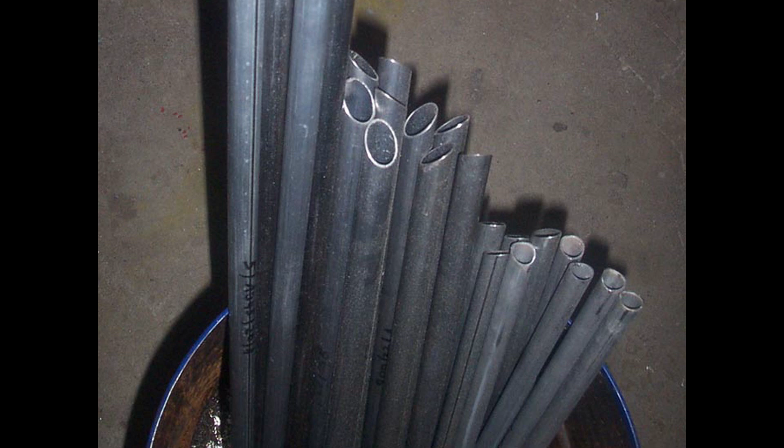In the summer of 2007, just 12 months after the start of construction, the 3 Fokker D.VIIIs were already so far advanced that I was able to present them to the public. Shortly afterwards, in November 2007, they were shipped to New Zealand. But they were far from finished yet.

Although they were not yet finished, they were wanted in New Zealand in advance, because they wanted to speed things up. They decided to manufacture all the missing parts themselves at their Wairarapa Aviation Limited, according to my plans. The original plan was for me to make everything for the airplanes except the wings and the engines, meaning the 2 planes and the rather bulky wings were out of the way at least.

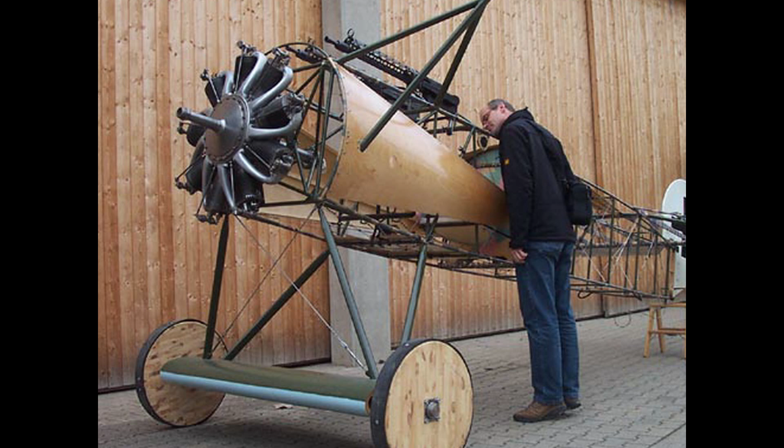But then things turned out differently, as usual. A short time later I was informed by Gene DeMarco that they had decided to have all the other missing parts made here at my place as well.

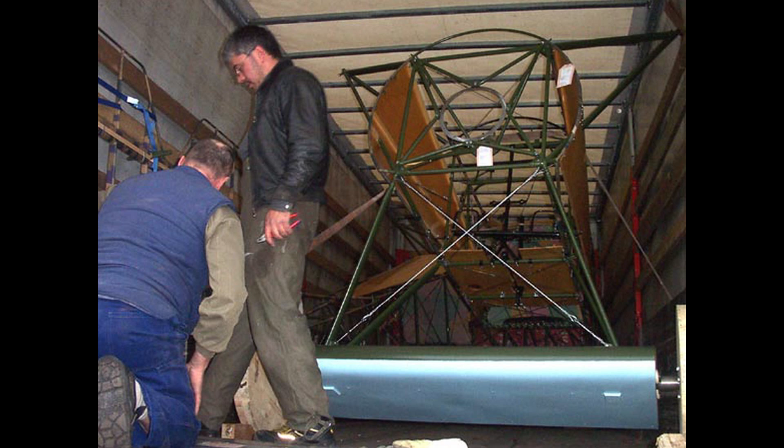That was of course an adventure and something I'm very proud of in retrospect. There were 3 airplanes of the same design, but 3 individually hand-built airplanes. There can be deviations in the design that prevent assembly in the end. Not even Airbus has managed something like this really well with all their distributed production sites.

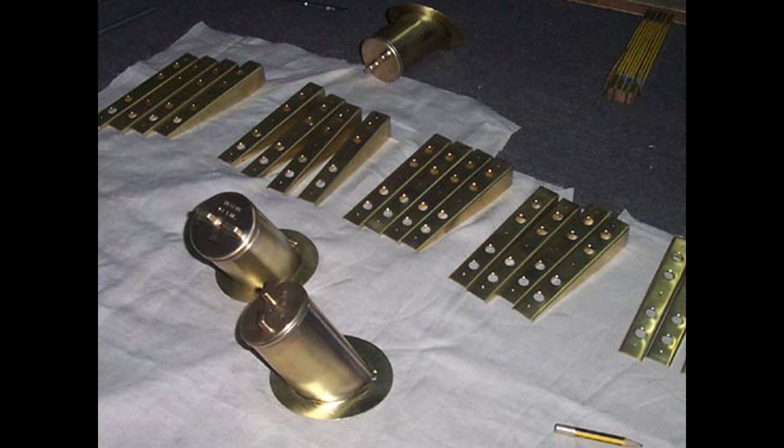I now only had my cuckoo of the 3 airplanes left at my place, and as it was just as advanced as the others, the theory was simple. Everything that was missing was built 3 times, adapted and fitted to cuckoo as a master pattern. I used the most unattractive of these 3 parts for my own airplane and packed the more beautiful ones for New Zealand.

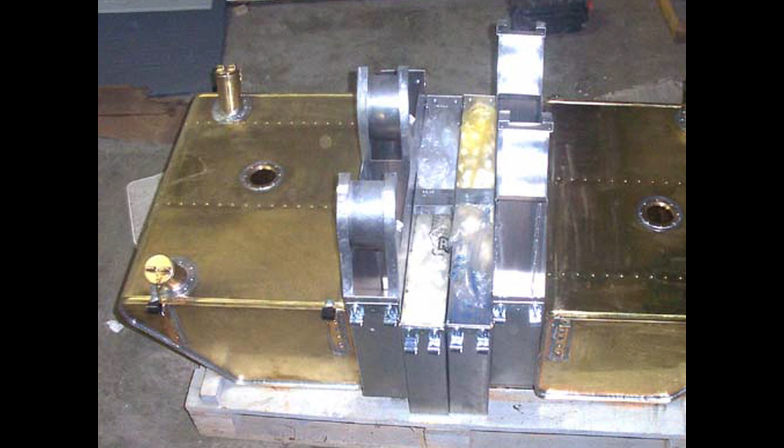It wasn't a small amount of parts that still had to be done, and so I built all the parts for airplanes that couldn't have been further away. Every meter further away would have brought them closer to me again.

Meanwhile, the construction of the D.VII and Dr.I was resumed. As I was now mainly working on the wings, I also started building the wing for my cuckoo. Shirley did a lot of work on this.

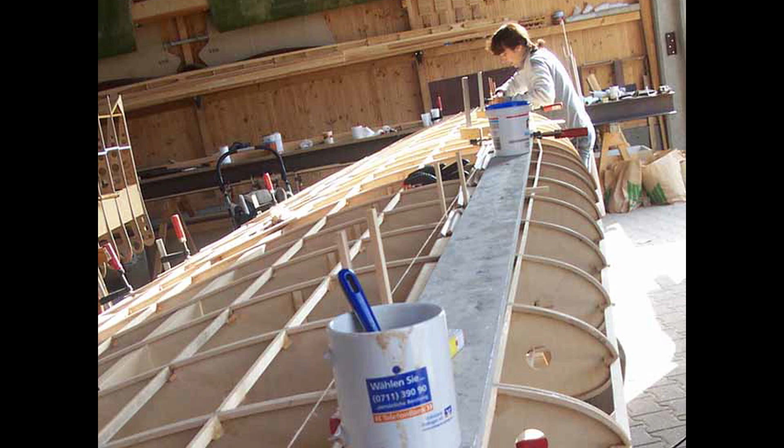When the installations for the completion of the entire fuselages of the remaining D.VIIIs were finished, I set mine up in my workshop. In the meantime, components of all the important Fokker war types were spread out there. The M series was represented by the E3, the V series by the DR1, D7 and D8 — a phenomenal sight.

When all the missing internals for the D8 had been completed for New Zealand, they were neatly packed and prepared for shipment. In the meantime, construction of the Rumpler C4 had begun in New Zealand, based on the plans that I and Hartmut drew up in the evening.

When it came to the tailplane and aileron components, which were made of tubular steel, I received an order from New Zealand to procure metric steel tubing in the qualities used at the time for all components, which I then did. They were to be sent to New Zealand together with the D8 parts.

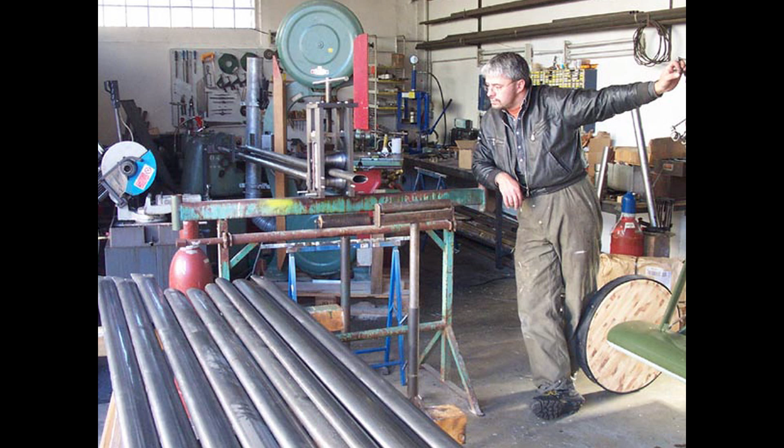Shortly before the shipping date, I was asked if I could perhaps produce the streamline-shaped undercarriage tubes for the legs of the heavy Rumpler C4 on my self-built forming machine. I wanted to give it a try. After all, my forming machine was not designed for heavy tubes of almost 80 mm diameter and 2 mm wall thickness. But it worked quite well, and so I made all these profiled tubes for the Rumpler C4.

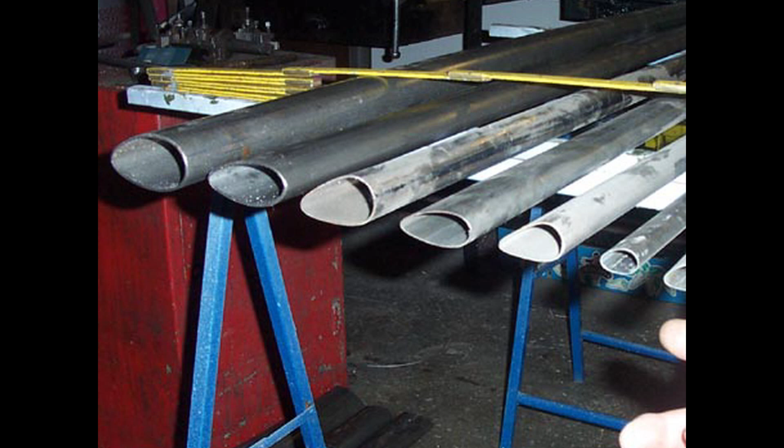When I placed my order for the steel tubes, I asked New Zealand if I could add the steel tubes for a full set of tail feathers and ailerons at my own expense, so that the set could be built for me at their place. No problem, they said. I had no intention of building a C4 myself, but you never know, so at least the foundations had been laid.

The steel tube and the D8 components were loaded into a container.

During my first visit to New Zealand, I spent most of the time in the workshop there, and there was a large anvil missing. They have never been easy to come by, and I still had a 140 kilogram heavy comrade in the corner that was too big for me.

I talked to Gene DeMarco and the workshop managers, and they were happy about this gesture. The block was out of my way, and the guys got something out of it. Small gifts keep friendships alive — most of the time.

A short jump back to the moment when the D.VIII was not yet shipped to New Zealand. Shortly before that, I gave a short interview for a radio program, and shortly afterwards I organized an open day at which the aircraft were presented to the public for the last time on German soil.

Many people attended, including Peter Kohaus again, who reported on this in issue number 2 of 2008 of the magazine Flugzeug Classic, when the planes were long gone already. I will play back the interview after the article, which I will now read out for you. Have fun with it.

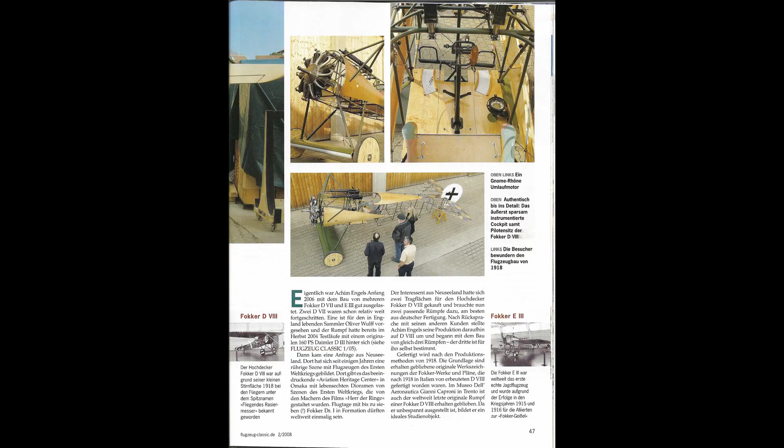2 D.VIIIs were delivered to New Zealand at the beginning of November 2007. At the beginning of 2006, Achim Engels was actually busy building several Fokker D.VIIs and E.3s. 2 D.VIIs were already relatively far advanced. One is intended for the collector Oliver Wulff, who lives in England, and the fuselage had already undergone test runs

with an original 160 horsepower Daimler D3 in the fall of 2004. Then came a request from New Zealand. A lively scene with aircraft from the First World War has been developing there for several years. There is the impressive Aviation Heritage Center in Omaka, with lifelike dioramas of scenes from the First World War, which

were designed by the makers of the film Lord of the Rings. Flying days with up to 7 Fokker DR1 in formation are probably unique in the world. The prospective customer from New Zealand had bought 2 wings for the monoplane and now needed 2 matching fuselages, preferably made in Germany. After consulting with his other customers, Achim Engels then switched his production to D.VIII and began building

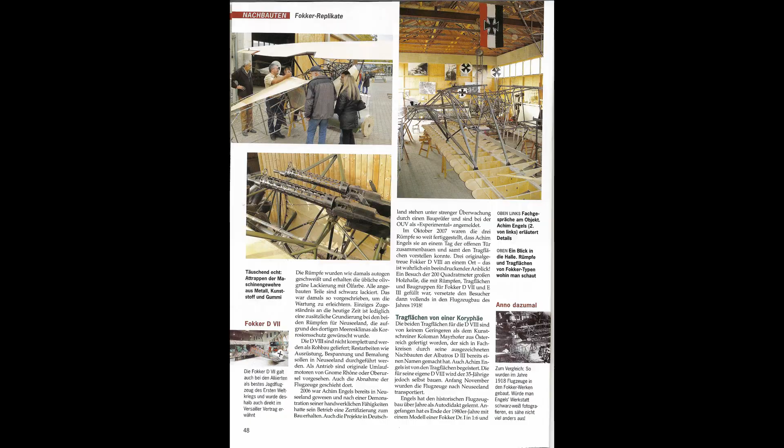3 fuselages. The third is destined for himself. The production methods used were those of 1918, based on surviving original Fokker factory drawings and plans made after 1918 in Italy from captured D.VIIIs. The Museo dell'Aeronautica Gianni Caproni in Trento is also home to the world's last remaining original fuselage of a Fokker D.VIII.

As it is on display uncovered, it makes a special ideal object for study. The fuselages were autogenously welded, as they were at the time, and were painted in the usual olive green paint. All attached parts are painted black. This was prescribed at the time to make maintenance easier. The only concession to modern times is an additional primer coat on the 2 fuselages for New Zealand, which was requested as corrosion protection due to the marine climate there.

The D.VIIIs are not complete and will be delivered as shells. Remaining work, such as outfitting, covering and painting, will be carried out in New Zealand. Original rotary engines from Gnome Rhone or Oberursel are to be used for propulsion. The aircraft will also be inspected there.

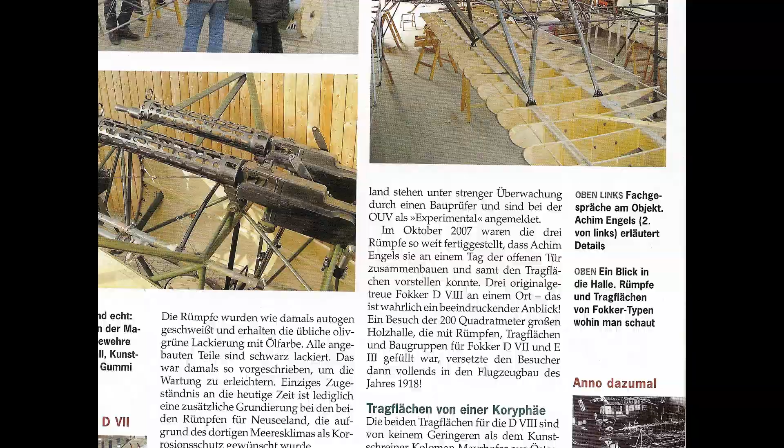In 2006, Achim Engels had already been to New Zealand, and following a demonstration of his craftsmanship, his company was certified for construction. The project in Germany are also under strict supervision by a building inspector and are registered as experimentals with the OUV, the Oscar Ursinus Association.

In October 2007, the 3 fuselages were completed to such an extent that Achim Engels was able to assemble them at an open day and present them together with the wings. 3 true to original Fokker D.VIIIs in one place is truly an impressive sight. A visit to the 200 square meter wooden hangar, which was filled with fuselages, wings and assemblies for Fokker D.VII and E3, completely transported the visitors back to aircraft construction of 1918.

Wings from a luminary. The 2 wings for the D.VIII were made by none other than the cabinet maker Koloman Mayrhofer from Austria, who has already made a name for himself in specialist circles with his excellent replicas of the Albatros D3. Achim Engels is also enthusiastic about the wings. However, the 35-year-old will build the wings for his own D8 himself.

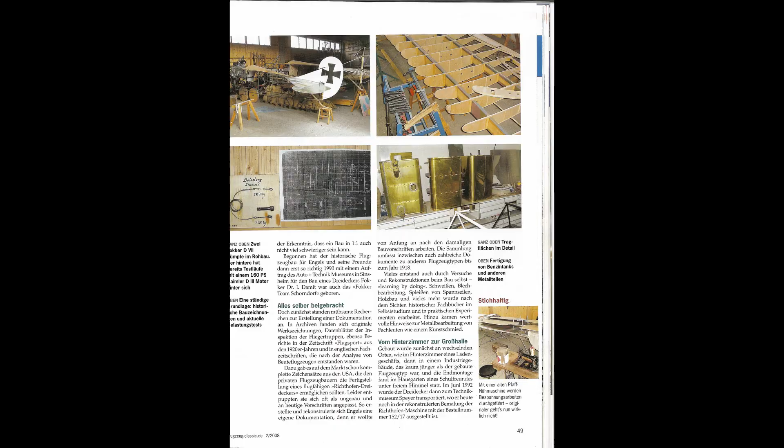The aircraft was transported to New Zealand at the beginning of November. Engels has been self-taught in aircraft construction for years. It all started at the end of the 1980s with the 1:6 scale model of the Fokker DR1 and the realization that building a 1:1 scale model couldn't be much more difficult.

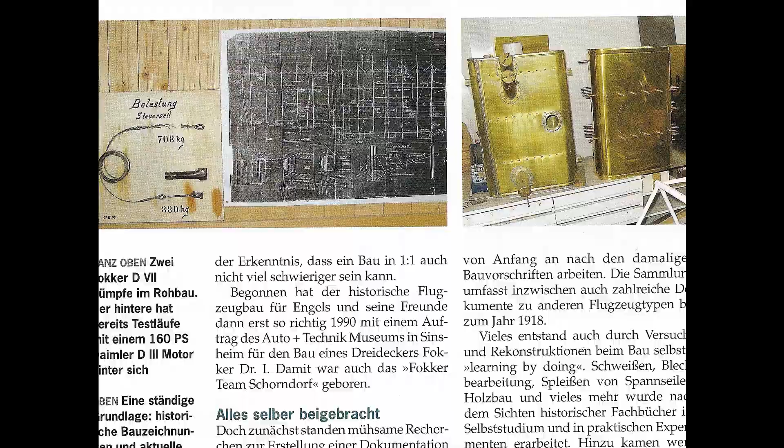Engels and his friends only really got into historic aircraft construction in 1990 with an order from the Auto and Technic Museum at Sinsheim for the construction of a Fokker DR1 triplane. This also marked the birth of the Fokker Team Schorndorf.

But first there was painstaking research to create documentation. Original factory drawings and data sheets from the German Inspectorate of the Army Air Service, Idflieg, were found in archives, as well as reports in the magazine Flugsport from the 1920s and English trade journals, which were created after analyzing looted aircraft.

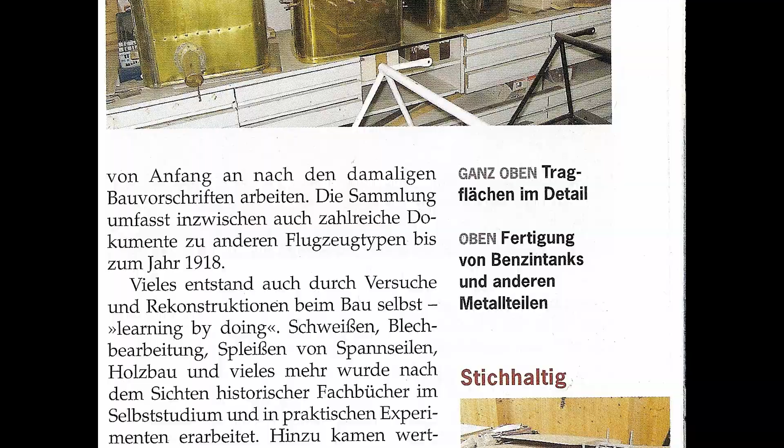Complete drawing sets from the USA were already available on the market to enable private aircraft manufacturers to produce an airworthy Richthofen triplane. Unfortunately, they often turned out to be inaccurate and adapted to today's regulations. Engels therefore created and reconstructed his own documentation because he wanted to build and work according to the building regulations of the time right from the start.

The collection now also includes numerous documents on other types of aircraft up to 1918. Much of this was also the result of experiments and reconstructing during construction itself, learning by doing. Welding, sheet metal working, splicing of tension ropes, timber construction, and much more was developed through self-study and practical experiments after consulting historical reference books.

Valuable tips on metalworking were also provided by experts such as a blacksmith.

From the back room to the large hall. Initially, construction took place in various locations, such as the back room of a store, then in an industrial building that was barely younger than the type of the aircraft being built, and the final assembly took place in the garden of a school friend's house in the open air.

In June 1992, the triplane was then transported to the Technikmuseum Speyer, where it is still on display today in the reconstructed livery of the Richthofen aircraft with the order number 152-17.